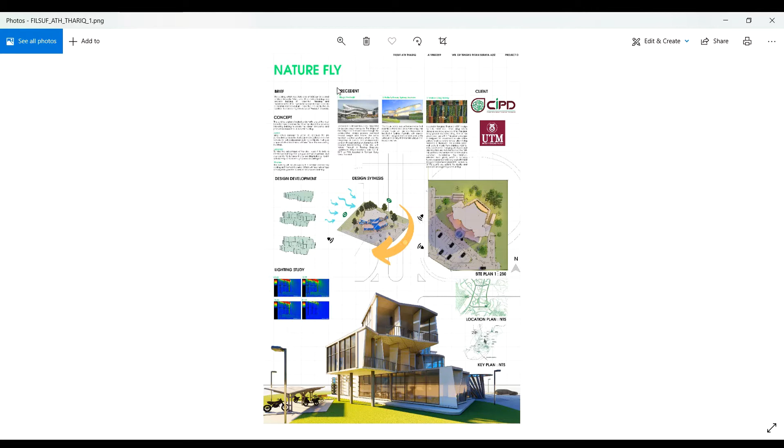First of all, the name of the building is Nature Fly. This building has a total area of 1000 SQM, located in Medini Iskandar Puteri, Johor. Nature Fly is a three-story building, a research building for innovative planning and development for CIPD. The center was established to obtain a dynamic research culture, innovative and productive, in addition to maintaining the status of a research university.

For my building concept, it is originally inspired by the butterfly, one of the most beautiful insects in nature. I took the idea of it to make an interesting building that creates a vibrant, innovative, and productive research culture. This building is built using the following concepts:

Green. For the green concept, I will bring a nature concept to urban life, because the site is surrounded by car traffic and pollution from vehicles, so I will design a green building here. It will give a special attraction different from the surrounding buildings.

Second is landscape. To take advantage of the site, I use it to build a landscape that will give a larger impression and comfort compared to the surrounding buildings, and will also help provide enough space for the parking lot.

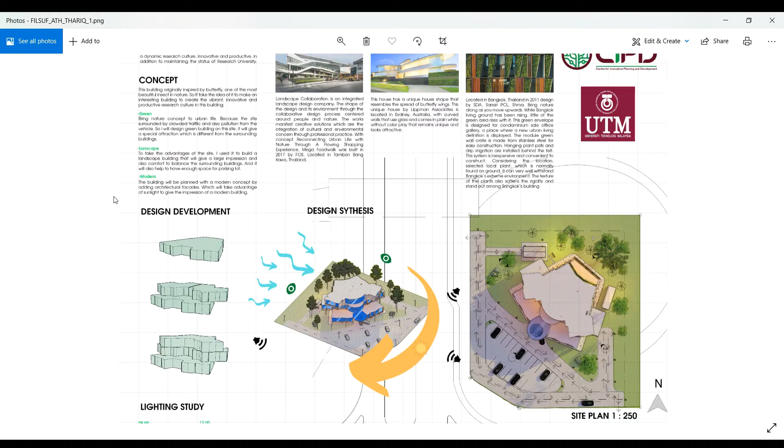Then the last one is modern. The building will be planned with a modern concept by adding an architectural facade which will take advantage of sunlight to give the impression of a modern building. I will show you later what my facade looks like.

Next is my precedent studies. I have three precedent studies. First is Mega Food Walk, located in Tambon Bang Kaeo, Thailand, by Landscape Collaboration, an integrated landscape design company. The shape of the design and its environment through the collaborative design process center on people and nature. The work manifests creative solutions integrating cultural and environmental concerns through professional practice, with the concept of reconnecting urban life with nature through a flowing shopping experience. Mega Food Walk was built in 2017 by FOS.

Second is Butterfly House, Sydney, Australia. This house has a unique shape that resembles spread butterfly wings. This unique house by Upman Associates is located in Sydney, Australia, with curved walls using glass, coming in plain colors without excessive color play, remaining unique and attractive.

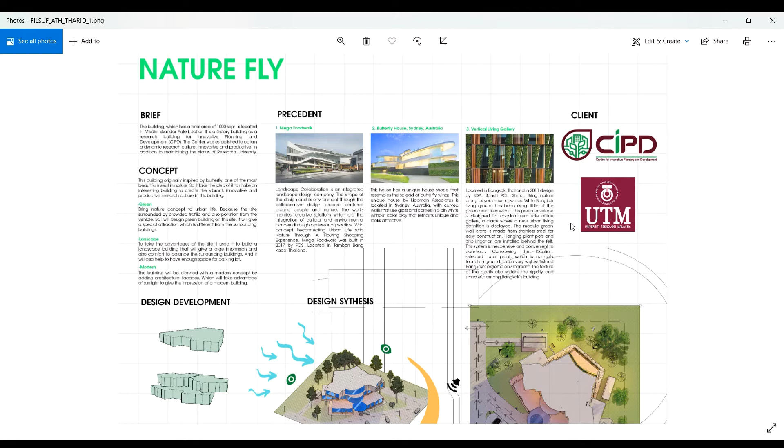Last one is Vertical Living Gallery, located in Bangkok, Thailand, designed in 2011 by SDA, Sansiri PCL, bringing nature along as you move upward. Bangkok living ground has been raising bits of green rises; this green envelope is designed for a condominium, office, and gallery, a place where a new urban living definition is displayed. The modular green wall crate is made from stainless steel for easy construction. Hanging plant pots and drip irrigation are installed behind the felt. This system is inexpensive and convenient to construct. Considering the location, local plants which are normally found on the ground can withstand Bangkok's extreme environment very well. The texture of the plants also softens the rigidity and makes the building stand out among Bangkok buildings.

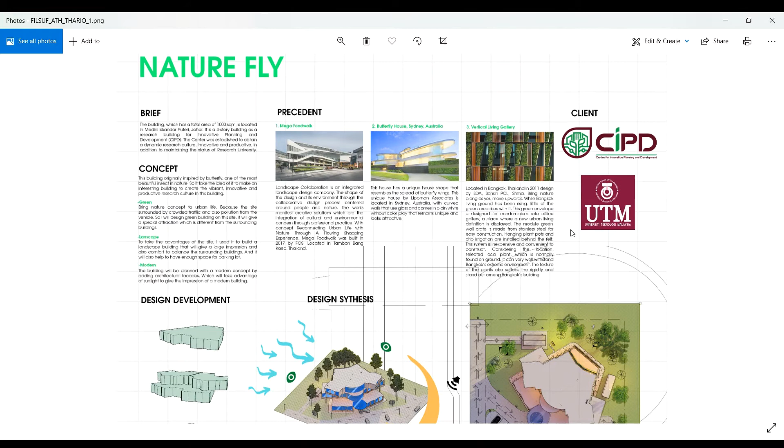So our client for this building is CIPD, Centre for Innovative Planning and Development.

Next is my design development. This is the first design development of the building. The first floor is the rough development of the shape of the butterfly wings, where the sides are made stiff. Next, for the second floor, it begins to depict the shape of the butterfly; the set of this building is made to resemble the wings of a butterfly. For the third floor, it is made to complete the butterfly form of the building.

For my design synthesis, from the building, the sun rises from the east side and sets on the west side of the building. The northwest side of the building receives the highest difference of wind. The site is surrounded with views, mostly open space, roads, and big buildings on Big Box. Smell comes from the smoke of vehicles and sewer water.

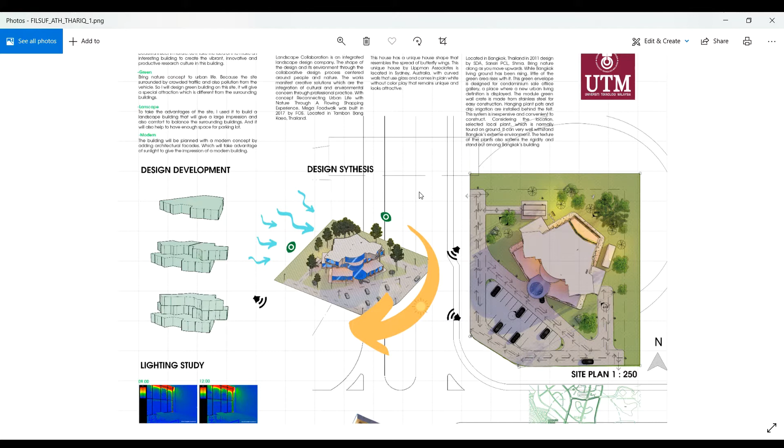Sound is generated by vehicles, nearby construction, and Sunway Big Box Retail Park.

The road on the side is a two-way street. On the front and side of the building is a way to enter and exit. In front of the building there is special parking area for cars, and for motorbike and bicycle beside the building.

To make it easier for visitors and workers to enter the building, there are two entrances. The main one is at the front, and another one in the motorbike section.

For the sunlight, this building has passive direct design because the orientation of this building is to avoid direct sunlight, utilizing the incoming sunlight through the facade to create an artistic impression for this building. The building orientation is the most strategic way to use sunlight.

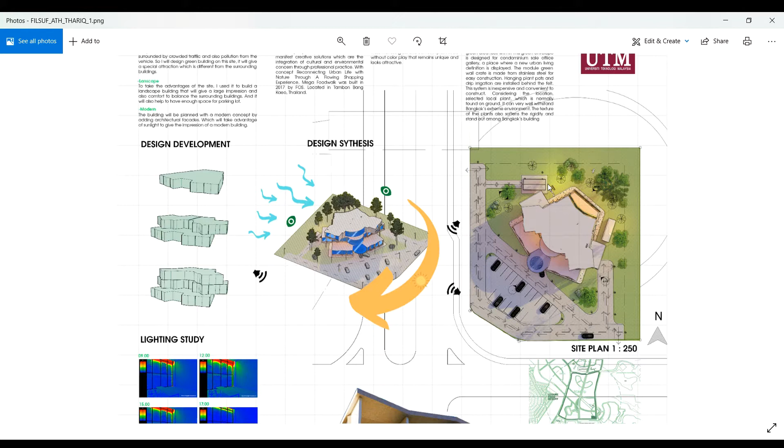The view of this building has a great view from both north and east. The north and east view of the building has natural scenery filled with greenery.

And for my lighting studies, the room of the building is really exposed - this is the lighting study area. The room of the building is not exposed to direct sunlight because the orientation of the building avoids direct sunlight.

For that, I take advantage of the facade that can balance the sunlight based on solid glass, and add some facade in some places. From this picture, we can see that the building only receives high amount of light at

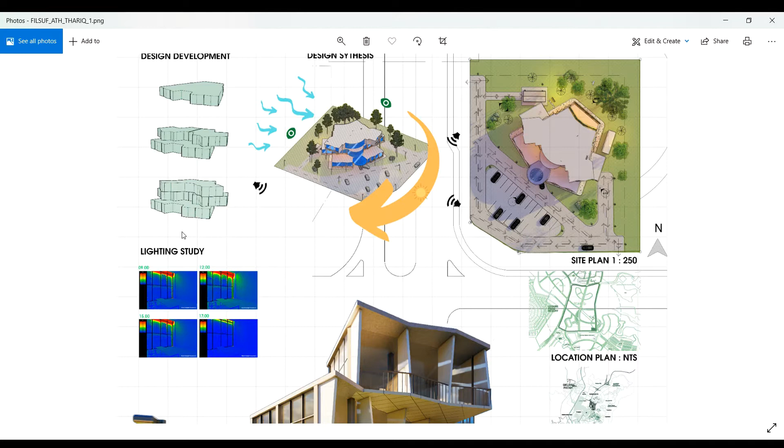12 and 3 p.m. This kind of lighting really suits the client, CIPD, since there are many users of electronic devices, especially laptops or gadgets, which will cause bad things when the room is hot, like lagging, crashing, and many others.

So this is my location plan and key plan, that is not to scale. Okay, next to my second board.

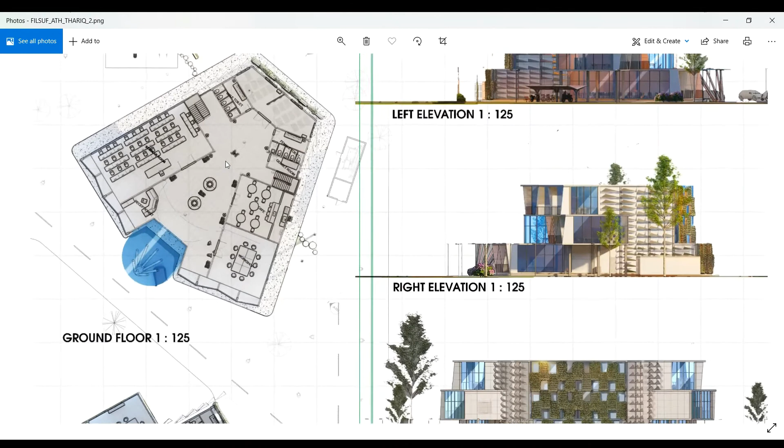So I will tell you about my floor plan. This is my ground floor.

In the ground floor of this building is designed for public spaces. There are seminar room, workshop, cafe, musola, and toilet for male and female. There is also a gents room beside the female toilet.

After the visitor enters this building from the main entrance, there will be a receptionist and lobby. There are also two stairs on the left and right side of the building. Outside of the building there is a parking lot, pump room, and refuse chamber.

The first floor is for semi-public spaces such as institutional main space 1 and 2, discussion room, and also male and female toilet, with stairs in the same place as the ground floor. There is also private space for service such as storage and AHU room.

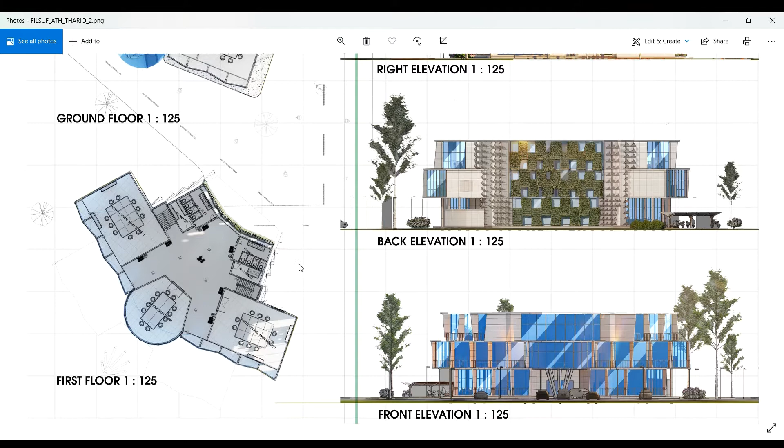The second floor is designed for private spaces like administration office, meeting room, game room, leisure room, toilet, and pantry for the worker. There is also a garden with beds in the balcony.

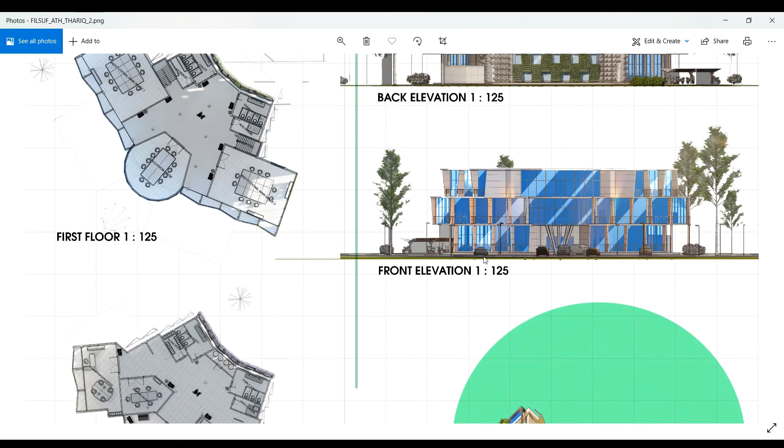All of my floor plans are scaled 1 to 125. So next is for my elevation. I get the elevation from each side - left, right, back, and front elevation.

This is the elevation. So for the elevation of the building, in the left and right elevation of this building, there is a facade with three triangular forms.

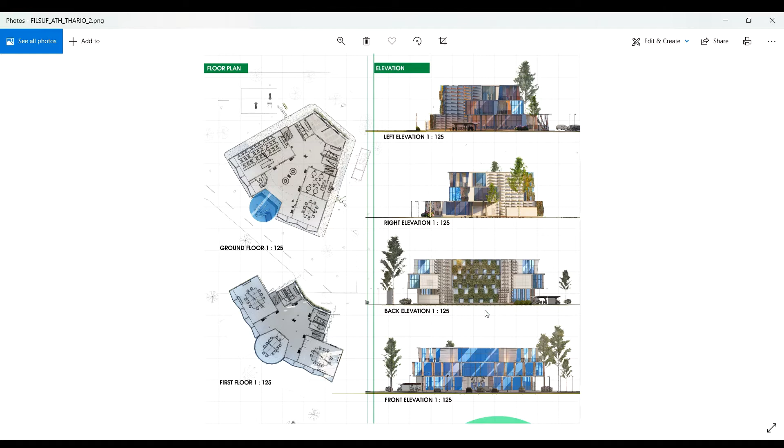The design of the facade creates a texture that provokes a contrast between shadows and reflection with different solar illumination. In the back elevation, there is a green wall facade. The texture of the plants softens the rigidity and stands out among buildings nearby.

And for the front elevation, it gives an eye-catching impression, minimizing the use of light because the light entering the room through the glass is sufficient. And it's all scaled 1 to 125.

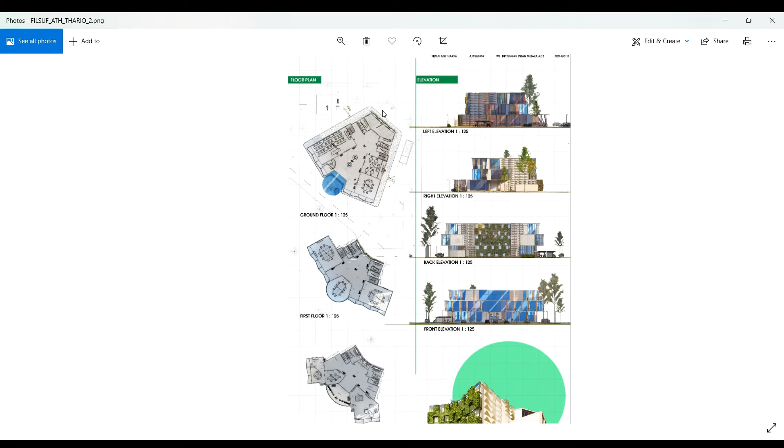And for my third board - this is my second, sorry. So this is my third board.

I got section AA with 1 to 125 scale for each of this, and section BB.

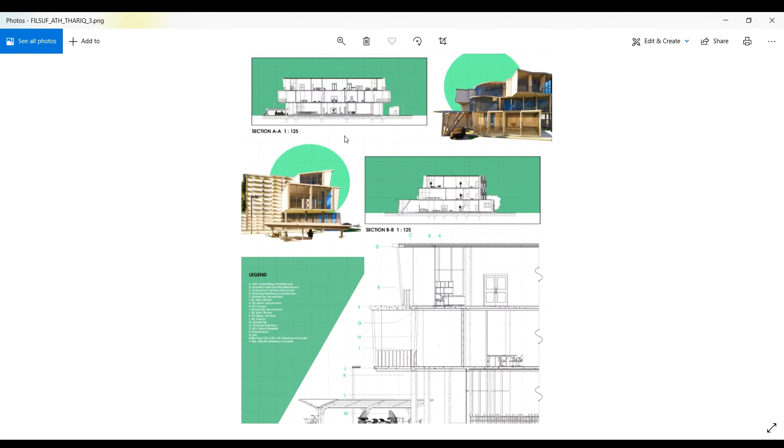So for my third board, this is the detail section that we're gonna explain. So in this detail section,

starting from the structure and material in this building, at the top point A is a rooftop made of concrete named self-compacting concrete layer.

In B, so it's a waterproofing membrane, we can reduce heat and reduce water. C, is cement mortar, a mixture of cement and sand whose function is to level the concrete surface.

D is the base roof reinforced concrete slab. The concrete used is also on the floor, which is the basis of the roof.

On the bottom floor at point E, granite tile is the top layer on the second floor. F, RC slab 120mm. Then point G is RC beam, reinforced concrete beam, which consists of horizontal and vertical members.

H represents the reinforced concrete column.

At point I, granite tile. J, RC slab 120mm. K, reinforced concrete beam, L, reinforced concrete column, have the same form as the second floor.

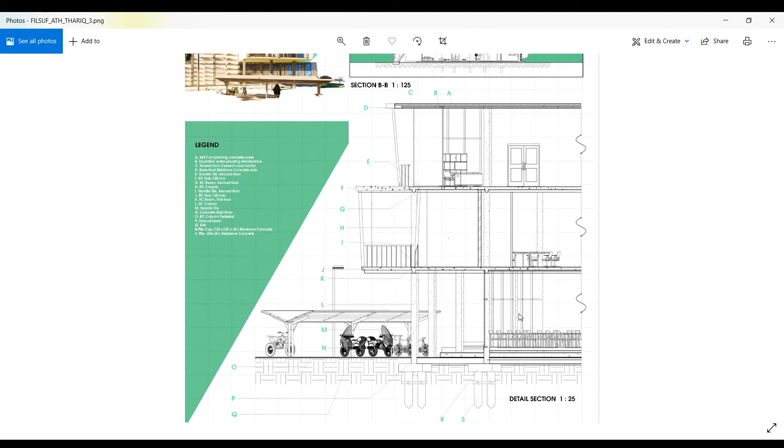For my next page, I got the detail from here, from the section. For special detail 1, that is located here.

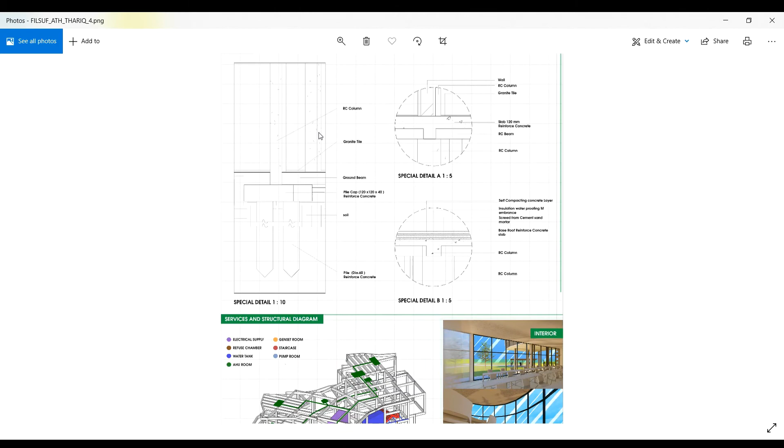In the function there is a reinforced concrete column which functions as the successor of the load of the entire building to the foundation. The column includes the main structure to carry the weight of the building and other loads such as lift load, human and goods loads, and wind loads. The column's function is very important so that the building does not collapse easily.

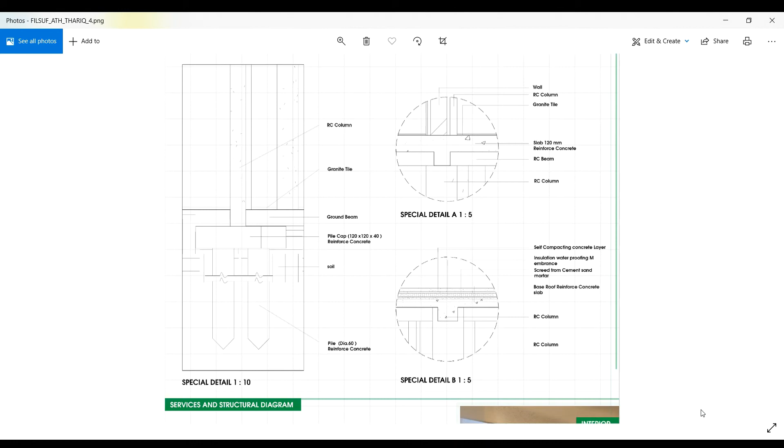Next is special detail A, which is located here.

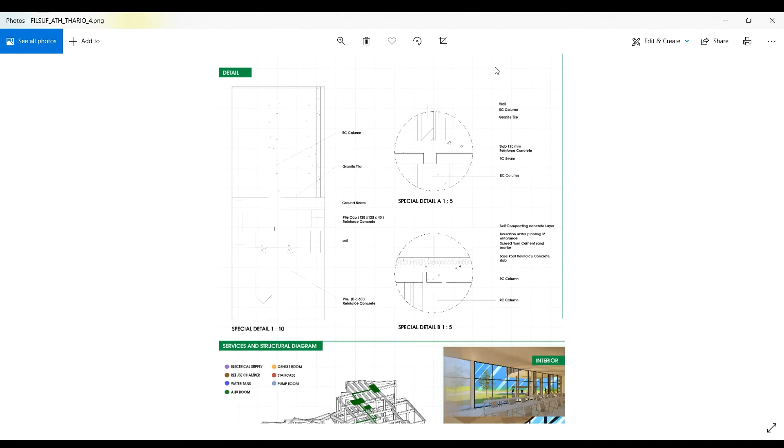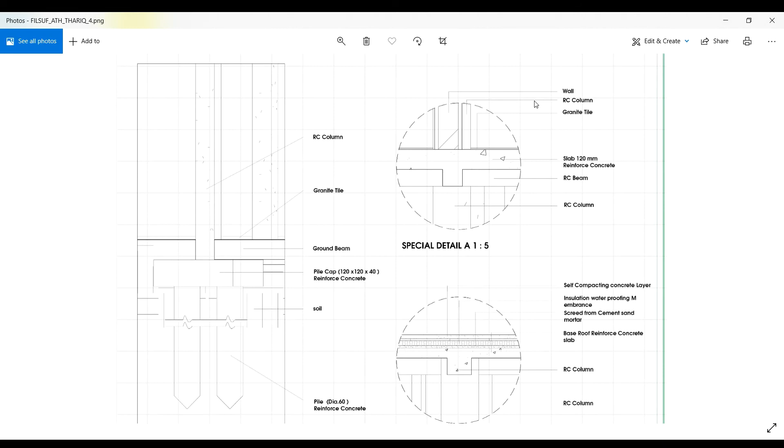Special detail A is part of the wall. The wall functions as a barrier between the outer space and inner space, as a barrier to light, wind, rain, dust, and other elements from nature. Then there is a reinforced concrete column, granite tile, and under the granite tile there is a screed. Then a reinforced concrete slab 120 mm, and also reinforced concrete beam and reinforced column. For special detail B, they are located here.

This section is part of the roof of the building. SCC, or self-compacting concrete, is a self-solidifying concrete so there is no possibility of cracking. This concrete is non-shrink concrete, so it's not easy to crack during the drying process.

Then, in order to maximize the waterproof roof and insulation, a waterproofing membrane is used, which is a water barrier as well as a heat barrier. Then the next layer is a screed made of cement sand mortar, whose function is to level the concrete surface. Then on the base of the roof there is a base roof reinforced concrete slab, namely the concrete used also on the floor which is the basis of the roof. Then there are also reinforced concrete column and reinforced concrete beam, which play a big role supporting the building so it stays strong. Next for the surfaces.

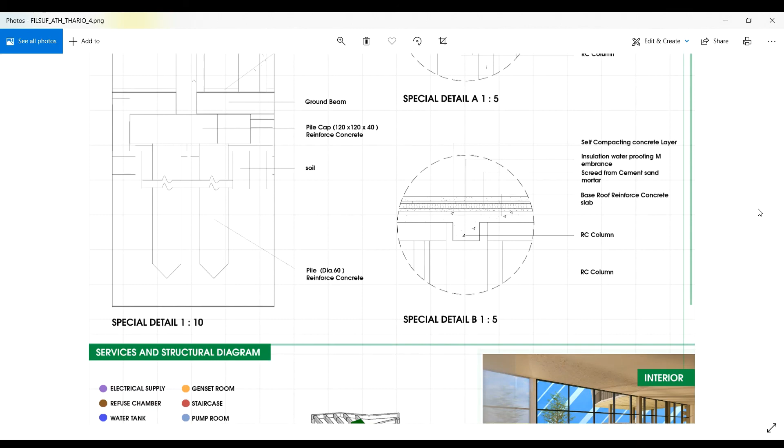The purple line in this image represents the flow of electric current coming from the nearby TNB substation. The flow is regulated in the switch room, which will be distributed to all parts of the building, both outside and inside. Furthermore, the brown color in this diagram describes the flow of dirt, dirty water, and garbage in the building, which will be collected in the refuse chamber, then channeled to the nearest sewers.

The blue color in this diagram means the water channel from the nearest water tank is collected in the pump room to be distributed to every floor of the building, especially the toilets. Green color is for the AHU room, which is an air handling unit used to regulate and process air before it is distributed to the building or room to be conditioned.

The orange color is a generator room. To meet the need for electric energy, the generator can be an alternative to meet electric energy needed or used during a local power outage. Last, the red color is the stairs that can be used by visitors. There are two stairs in this part of the building, outside on this side of the building.